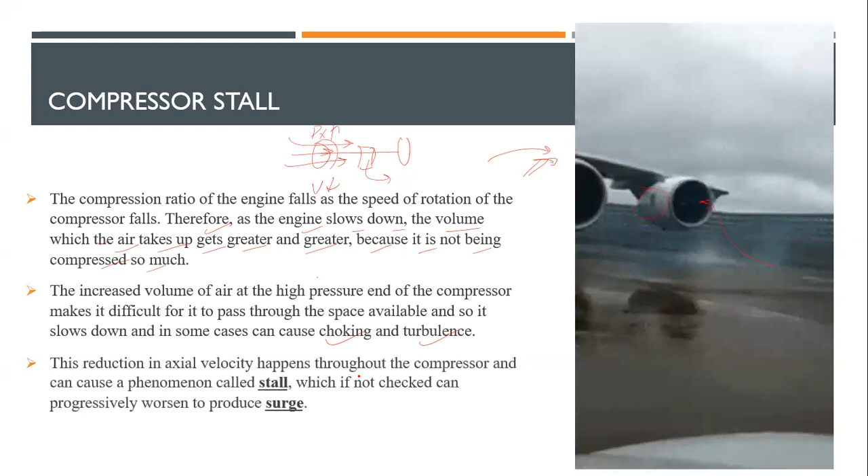The reduction in axial velocity happens throughout the compressor and can cause a phenomena called stall. If not checked, it can progressively worsen and produce surge.

A stall is a part in an engine, so we can have a compressor stall. But when the engine itself starts to break apart because of one of the three factors not working, then we can have something called surge.

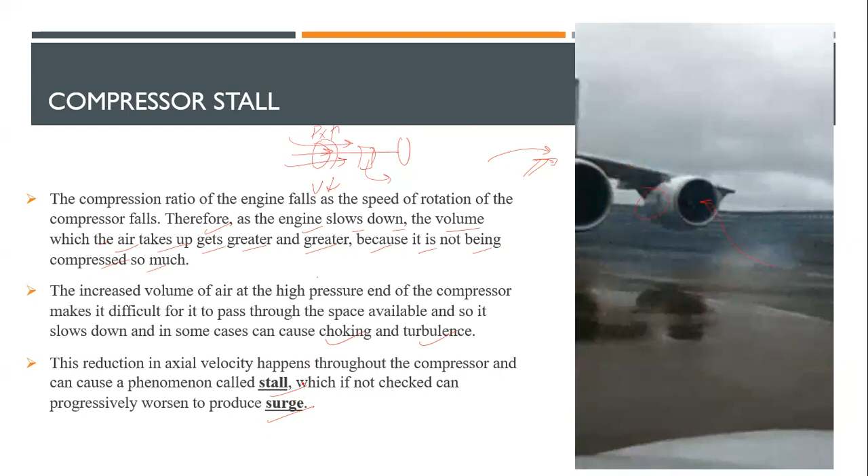We'll discuss the reasons for the stall. As we know, blades also have an angle of attack, and they are shaped like that. So if the angle of attack of a compressor blade is the result of the axial velocity of the air passing through it and the rotational speed of the blade...

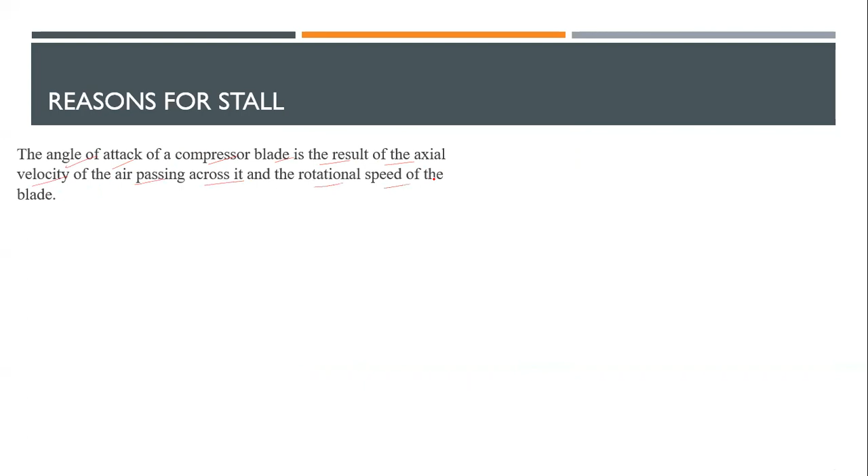If the angle of attack exceeds a certain point, like this example, you can see the airflow itself is distorted. So we will not be able to achieve any values. All this air is stuck here, and when the air is stuck, there is no passing through. Again, we have something called stall.

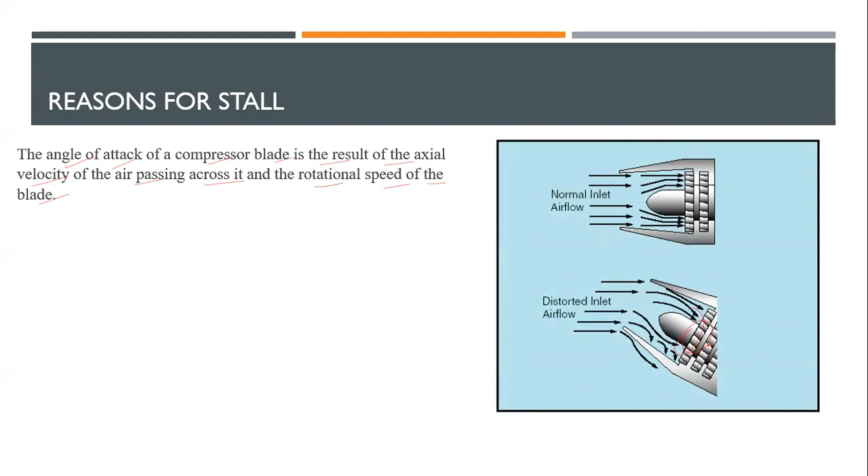Please, guys, don't confuse yourself with the stall of aerodynamics. This is the stall of the engine we're talking about.

Now, compressor stall can occur through various causes, some of which are as follows: excessive fuel flow caused by abrupt engine acceleration, as we saw in the previous video, when abrupt engine acceleration took place.

The axial velocity is reduced by increasing the combustion chamber back pressure. Back pressure is simply this: three components are involved - turbine, combustion, and compressor. When airflow is directly introduced here, pressure increases here, so this is a high pressure area. But because air is blocked here and does not go through, we have a restriction.

Remember, it is getting heated up really high. So what happens is we always know things go from higher pressure to low pressure. Comparatively, airflow will try to go this way, and this is known as back pressure. We'll see this also.

Engine operation above or below the engine design RPM parameters increases or decreases the rotational speed of the compressor blade. Suppose the engine manual tells us we should operate within some range, but we do it less than or more than that - then the compressor's angular velocity will reduce, and when that reduces, that will cause stall again.

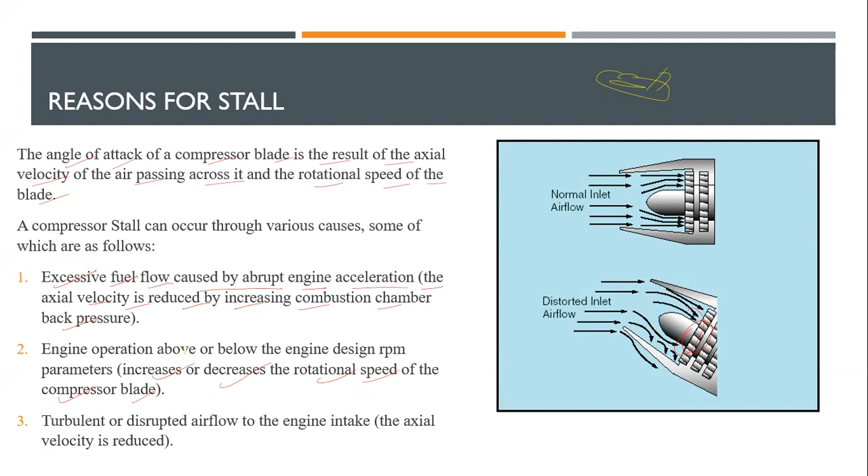Or we have this example also - distorted airflow directly introduced. If you keep increasing the aircraft's angle of attack, this can result in stall. But this is instantly - remember, this is instant, not gradual over time.

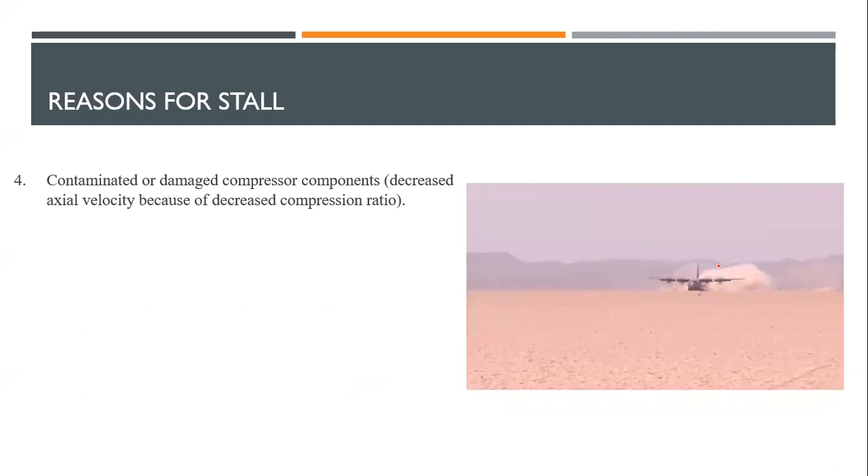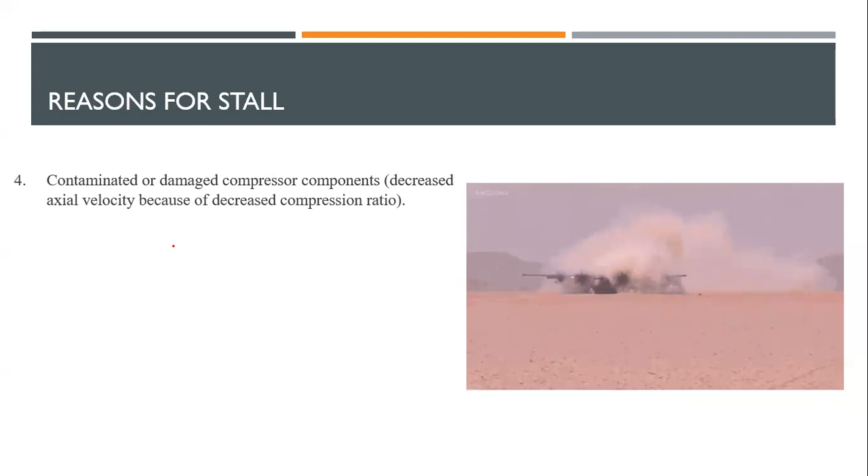We can also have compressor damage. Suppose this aircraft is landing - of course, this aircraft is designed to land in areas like deserts, so sand particles can go inside this type of engine, and it's designed to handle that. But normally, our airlines and commercial aircraft are not designed to absorb these things. So contaminated, damaged compressor components can also lead to such issues.

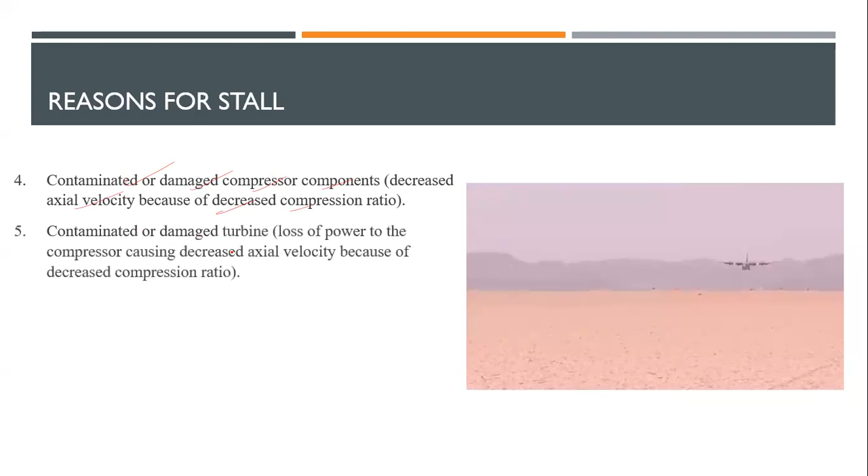Not just the compressor - the turbine section can also have this problem.

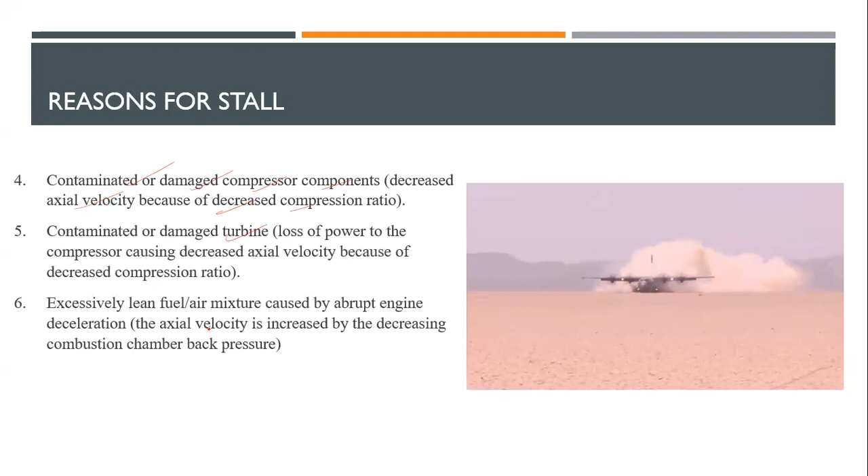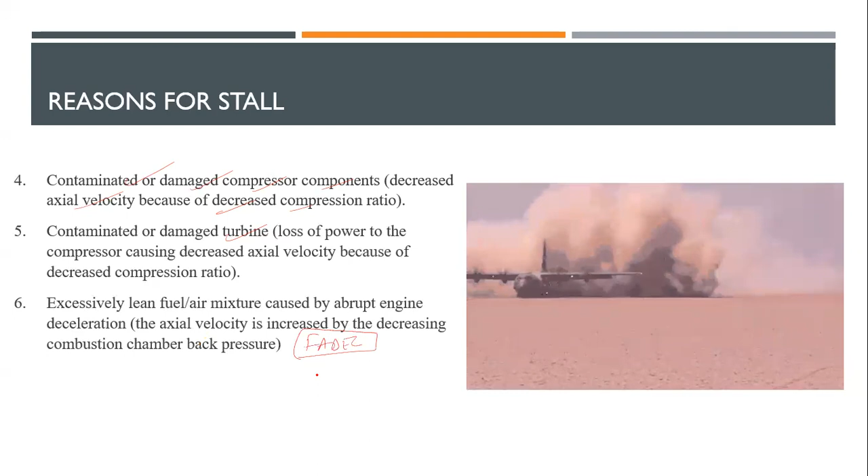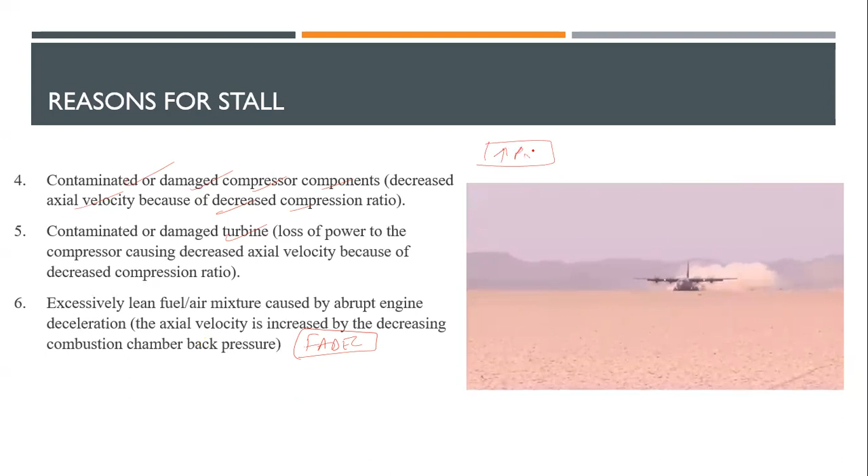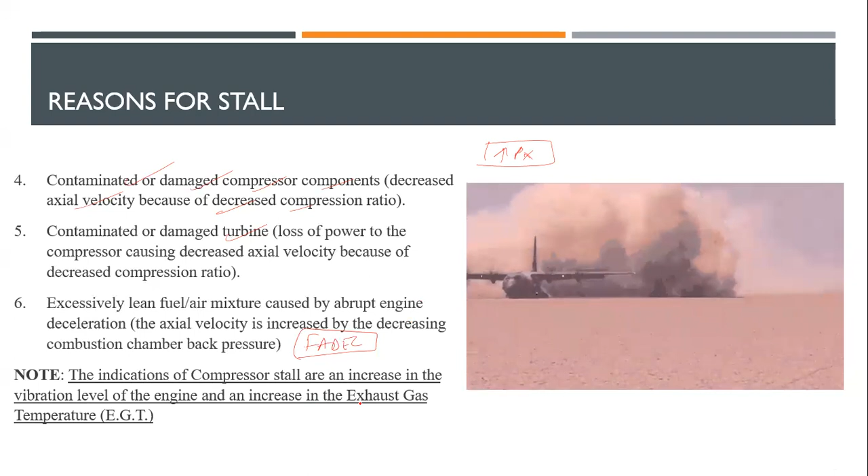The indications of a compressor stall are simply an increase in the vibration level of the engine and an increase in EGT. EGT is exhaust gas temperature. Now, why is the compressor stall recoverable?

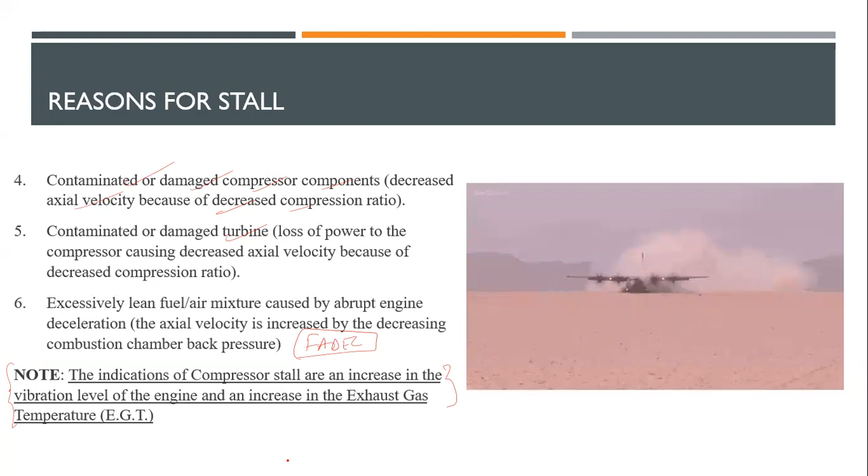Yes, if we get the right indications. If the pilot gets these indications and acts at the moment, then they are okay. But if they ignore it, then we have something called surge. Then the engine is gone out of the hands, and we are wasting our

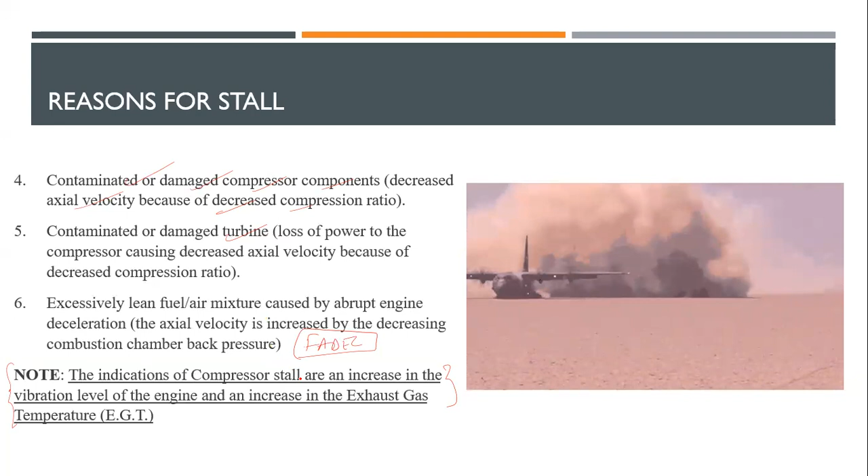one million dollars. So as I'm talking about this, just underline these things. If you have notes, highlight them because this is a direct question: what are the indications of compressor stall? Engine vibrations, or increase in vibration level, and an increase in EGT - both of them.

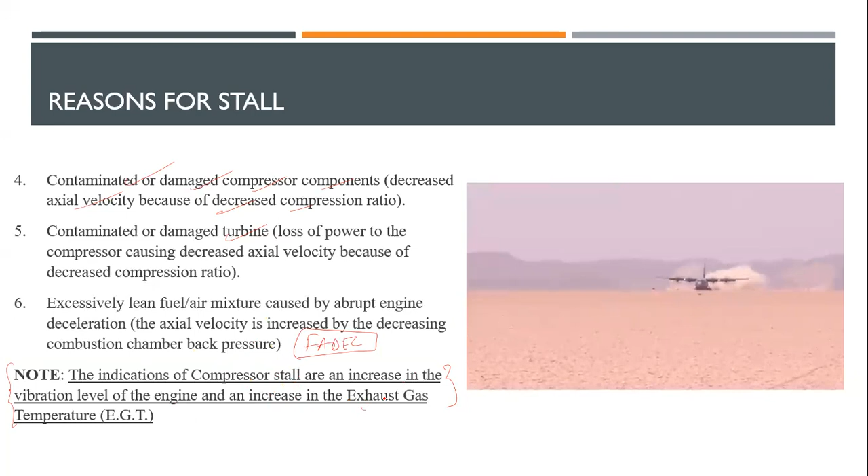Now we have the surge. What is surge? It's the progressive deterioration of the situation of the stall, which will eventually cause a complete breakdown of the airflow and an engine stop. In severe cases, that would cause an instantaneous reversal of the gases in the engine, with air being expelled through the engine intake with a loud bang.

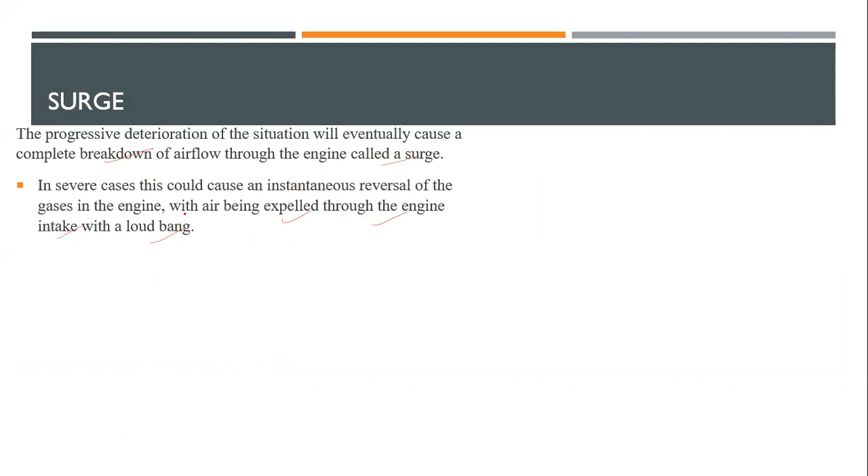As I told you in the previous example, that's the same thing which happened here. If surge does occur, the throttle of the affected engine must be closed slowly. If not, the engine will go into a boom. This situation is most commonly caused by fuel system malfunction and mishandling - if the fuel system, automatic or otherwise, is malfunctioning or mishandled, we can have high lean mixtures, and again stall, then again surge.

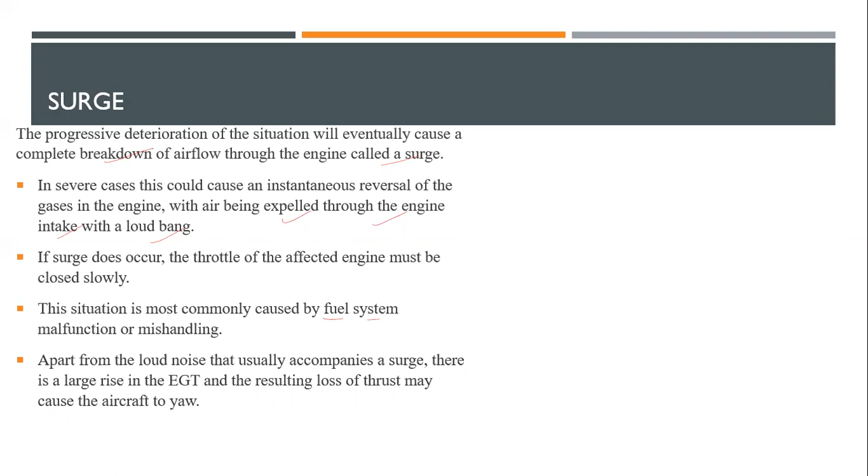Apart from the loud noise that usually accompanies a surge, there is a large rise in EGT - exhaust gas temperature - and the result is lost thrust. An aircraft can also yaw. You can see here we kind of had something like that. The airflow is being expelled outwards.

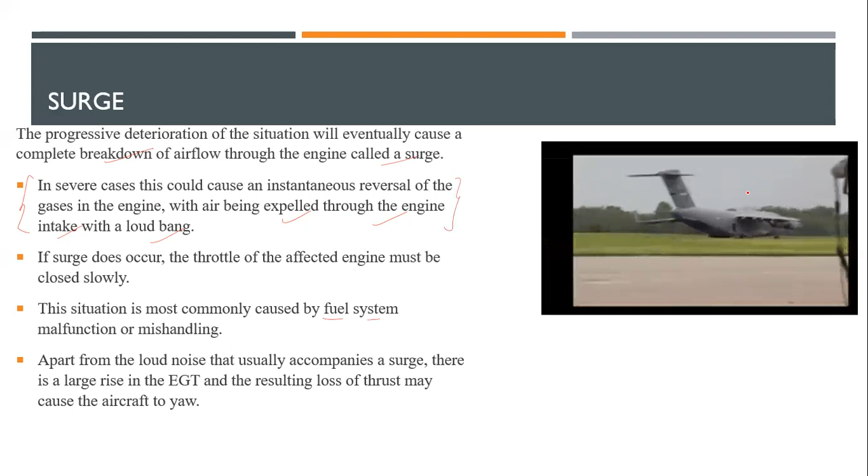But this is a case of reverse thrusters also. In the C-17 we have a reverse thruster, so the aircraft is in back gear, you can say. But this is an example you can have - when you're having a complete surge of an engine, it will behave this way, so the aircraft is taxiing backwards. It'll feel like that, all right.

Note, surge is a complete breakdown of airflow through the engine, which in the worst scenario can cause the airflow through the engine to instantaneously reverse its flow direction, which is shown in this video.

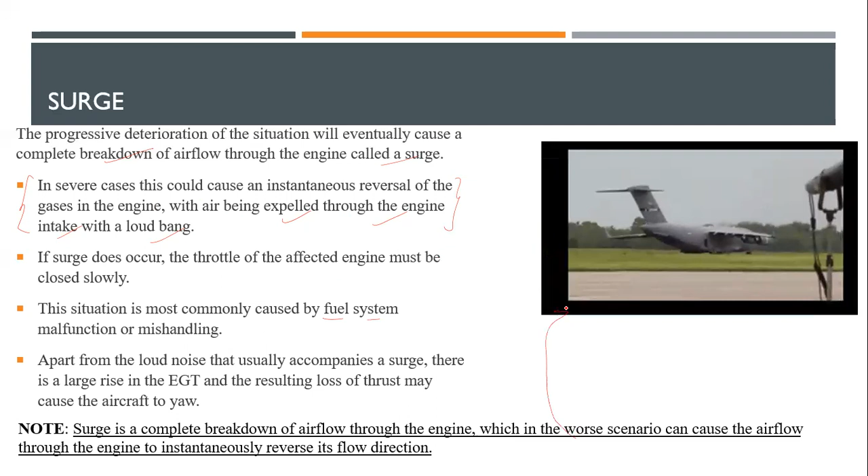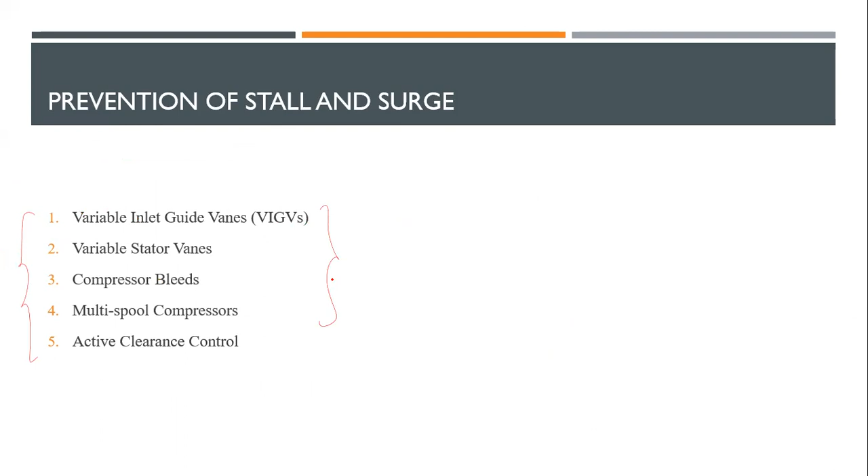Prevention of stall and surge - how do we prevent this? Now we know what is the problem, let's see what is the solution. We have variable inlet guide vanes, one of the best things we can have - I'll explain you one by one. Variable stator vanes, compressor bleeds, multiple spool compressors, and active clearance control. By their own definitions and words, you can understand what they mean, but one by one I'll give you the example and explain what they are.

This is your variable inlet guide vane. What is the variable part here? You can change the angle of the inlet guide vanes.

What is the role of this? If you're able to guide the airflow properly at high angle of attack, you can reduce problems. You can allow more airflow inside, or when you don't want more airflow, you can turn these variable inlet guide vanes. Of course, the pilot does not do all this manually - he has a lot to do other than this. This is already a system: the engine itself maintains variable inlet guide vanes. These vanes are fitted just in front of the first rotor stage. Important point: at low compressor speeds, the VIGVs are angled to impart the greatest amount of swirl, thereby correcting the relative airflow. They're closed at low RPM because when we are at low RPM, more airflow being introduced can cause surge.

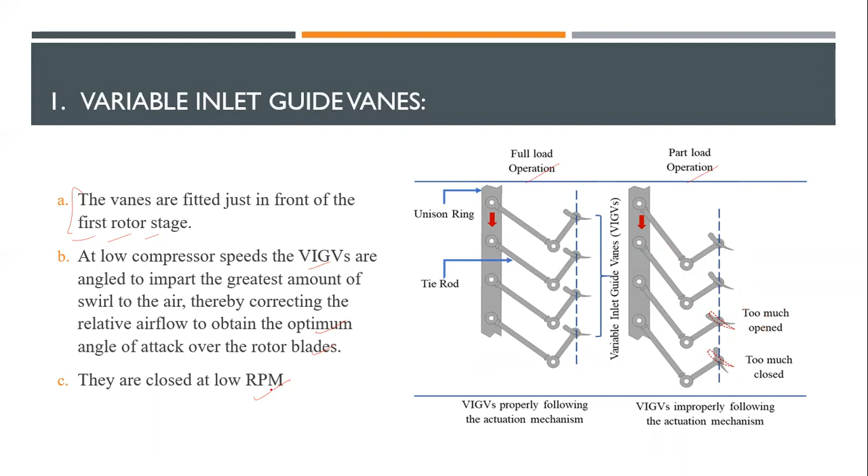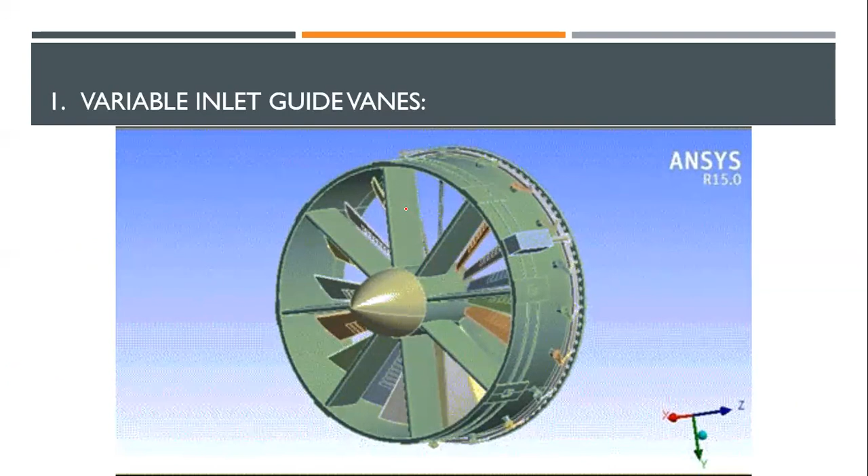So you can see both of them operating here - these are the full load operation. Too much open, too much close - all these things are written here. All in all, you have to make sense of it. You could start to imagine what I showed you in the previous video. Whenever we are having high RPM, we need more airflow inside, right? More combustion is taking place. When we are at low RPM, we can close these so that not much airflow can go inside.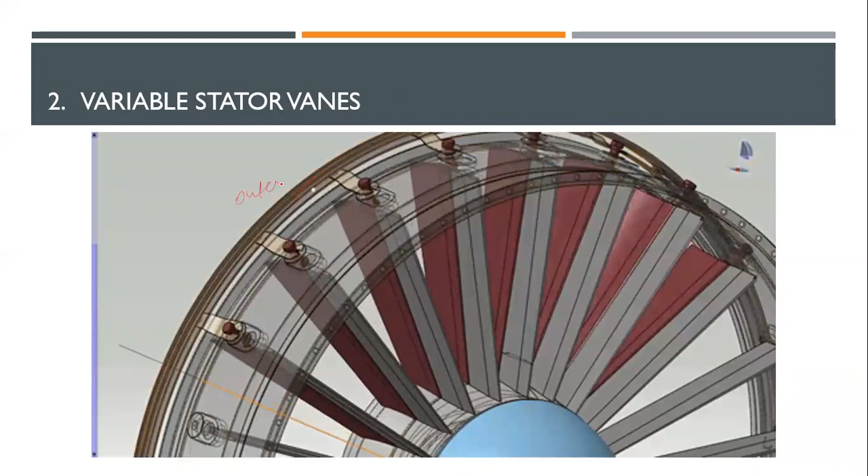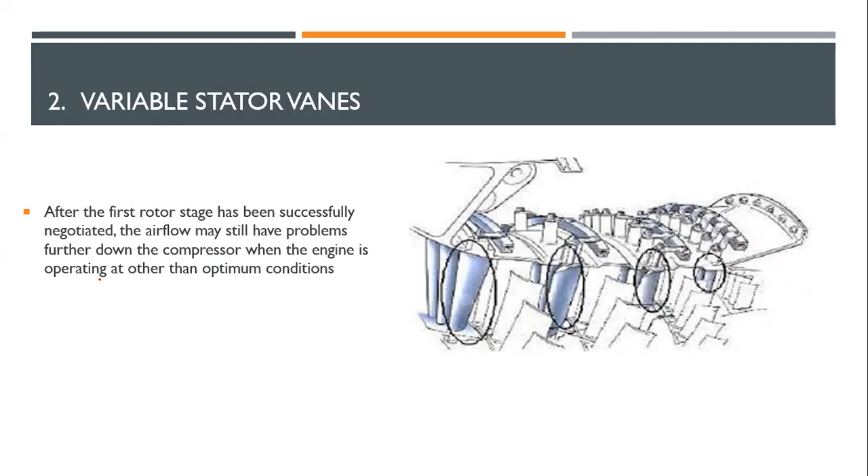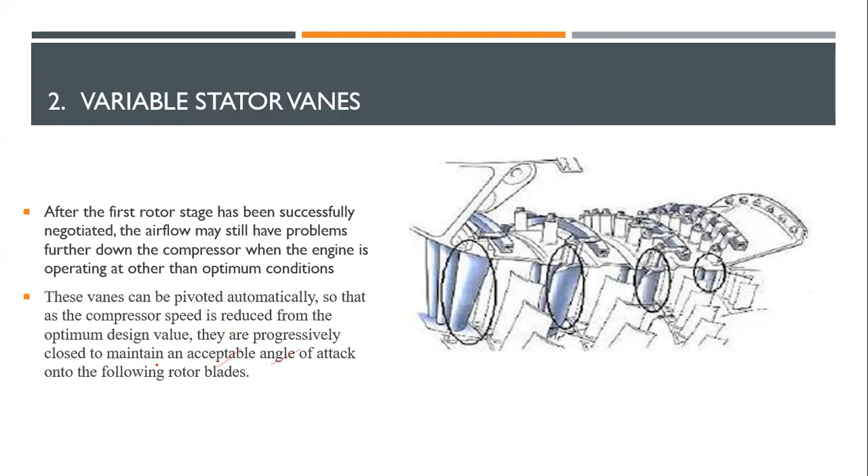Variable stator vanes - so these are also variable. You can see these are variable, you can change them, and you can clearly see it is attached to the outer casing, the stator or stationary vanes. After the first rotor stage has been successfully negotiated, the airflow may still have problems further down the compressor when the engine is operating. The vanes can be pivoted automatically so that when the compressor speed is reduced from the optimum design value, they are progressively closed to maintain the angle of attack. Again, the angle of attack plays a role here - not your aircraft's angle of attack, it's the blades, your stator vanes, your rotor.

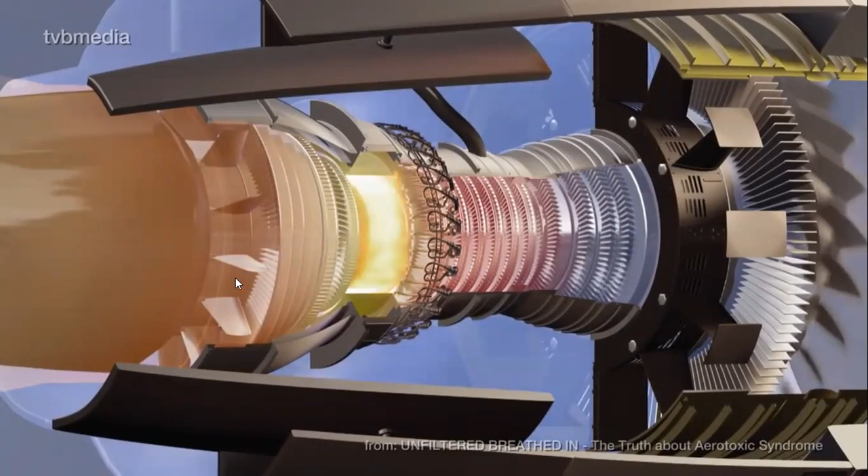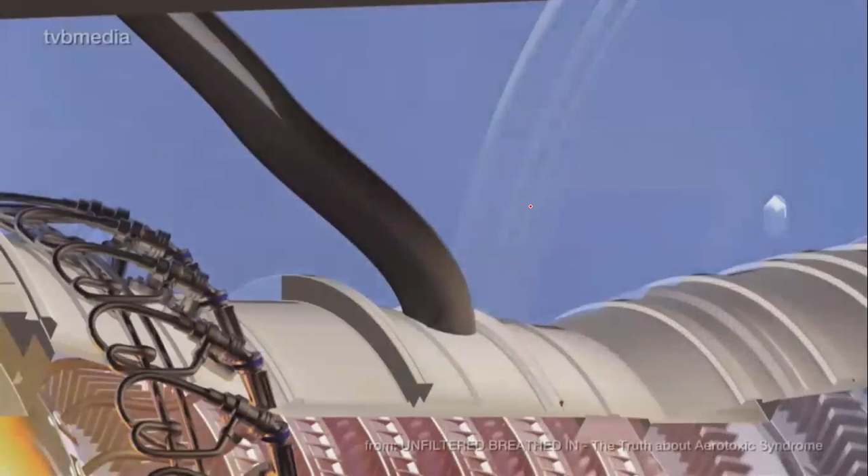Then we have the bleed air. The bleed air is simple - if we have a lot of airflow inside, we will simply escape it. This keeps the rotation in motion. Most engines also provide pressurized breathing air or cabin air. This air is let off from the compressor stages within the turbine. It is therefore called...

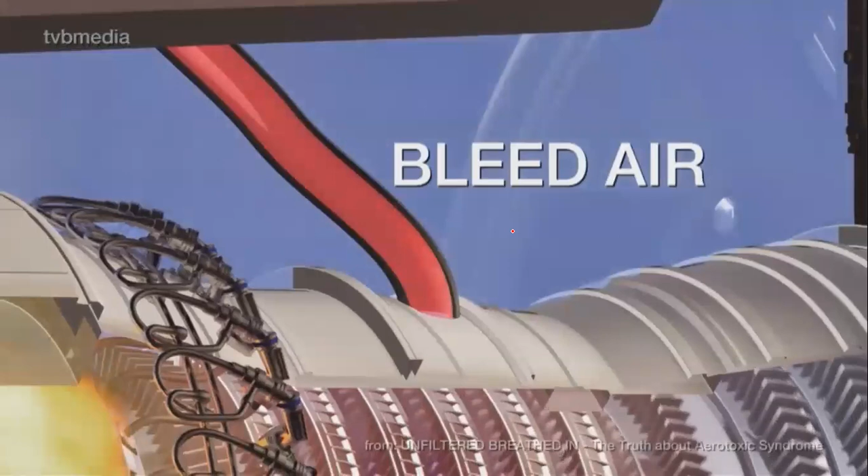Air conditioning - good. As you can see in videos these days, people explain that the air in the cabin and cockpit keeps on circulating and refreshing, every 20 seconds or so, for the same reason. When we are taking some air, this is fresh air, it is cold, it is fresh, so we just direct it into the cabin. We have filters inside and many other things, so the bleed air is used in such ways.

And what is its role in this? If a lot of airflow has come and the compressor is not moving properly, what will happen is we will direct some airflow inside so that the compressor starts to circulate as it wants, and the stall does not occur. When the engine slows down, stall might occur.

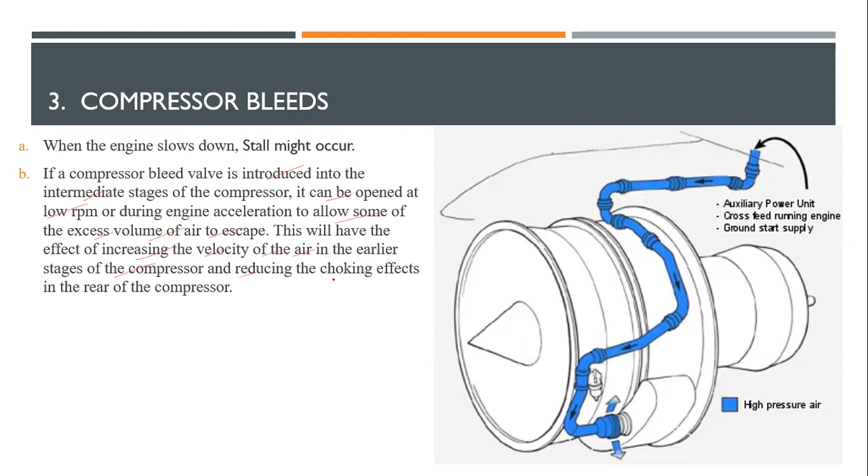If a compressor bleed valve is introduced into the intermediate stages - that means in the middle stages - it can be opened at low RPM, allowing some of the excessive volume of air to escape. This will have the effect of increasing the velocity of the air in the earlier stages, reducing the choking effects. Stall is like a choking effect of the compressor, and that is what this is avoiding. The disadvantage of the system is that opening compressor bleeds, whether they are stall preventive measures or bleeds...

What does it do? We are decreasing the overall mass. When we reduce the overall mass, remember force is equal to mass into acceleration. If we reduce the mass, the thrust reduces. That is the major disadvantage.

But the pilot has one option, either to save the engine at the moment or to maintain the thrust. He or she will probably choose to save the engine and open the bleed air. This will cause a drop in thrust for a given throttle position, which raises the specific fuel consumption or SFC. It also raises the EGT because of the drop in the amount of cooling air available.

So we have these reasons, but we know for sure that the engine is about to stall, so we will do the necessary action. Of course, it's also automatic, and the bleed air keeps on working. But the pilots also have a special control in the cockpit.

You can use it for external power, or if you want to increase it, you can see the APU, cross feed, and the ground start supply. They feed into the engine. So if you remember, someone asked me, or I also asked you, how do we start the engine if the compressor is the first part we spin? So I'm giving a hint right now—these are the things we can use to initially spin the compressor.

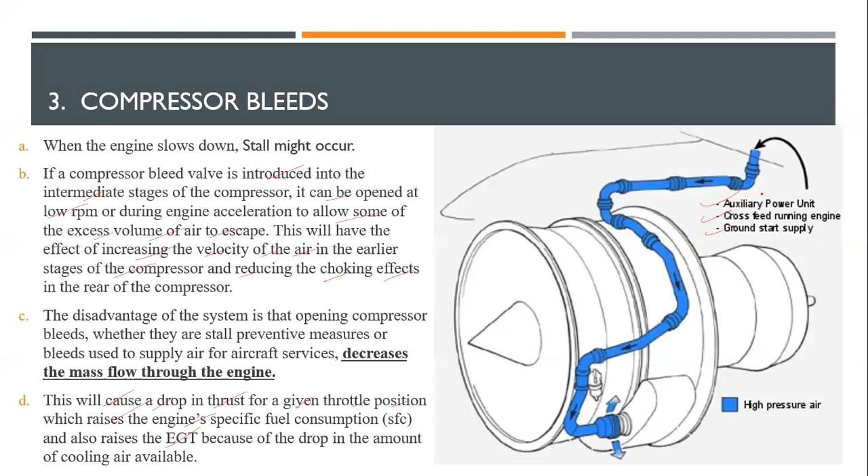Then we have the multi-spool compressor. I think I've already told you what this is, right? So if you have multiple spools, that is different spools, then what happens is we have a gap, or simply this one is already a little less, this one more.

So what will happen is one of the compressors works with high pressure, the second one works with low pressure. So the workload is distributed among all these compressors, and only one of the compressors does not carry too much workload. Just like in the cockpit, the workload is shared by two pilots—the compressor also shares the workload.

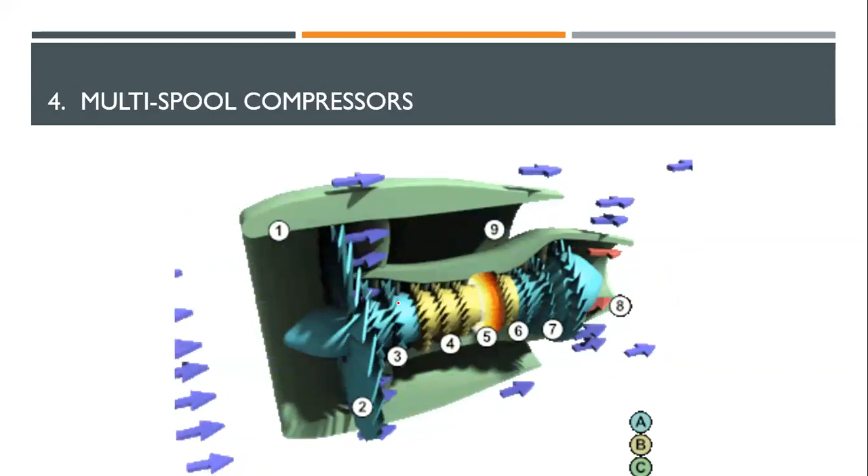Each section is driven through a shaft, and the whole unit of compressor sections is known as a spool. I've already explained spool. By designing the engine so that upon closing the throttle, the speed of the low pressure spool falls more rapidly than the high pressure spool.

We can see with this picture also, there are two shafts, two spools. So according to the throttle and the pilot's control, these will also move and rotate.

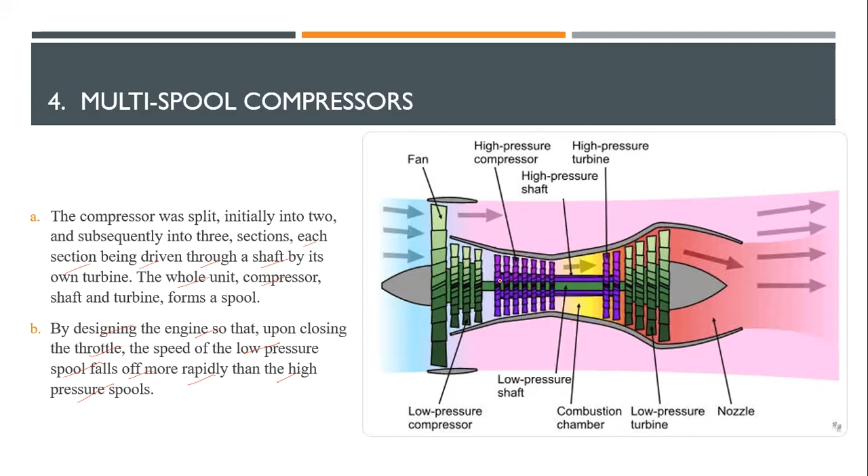Okay, then we finally have these—what are these? Active clearance control, which can be seen here also. Basically, we are allowing some portion, this portion, known as the clearance area—the small gap. You might not be able to see much, but there's a small gap between the casing also, you can see it here.

What is this gap used for? The axial velocity can be controlled over the whole of the engine speed range, so the chances of a stall and surge happening are less or diminished. So the airflow, at least stopping here, there is some point it can go here and there—here also you can see there's a small point it can go over the top.

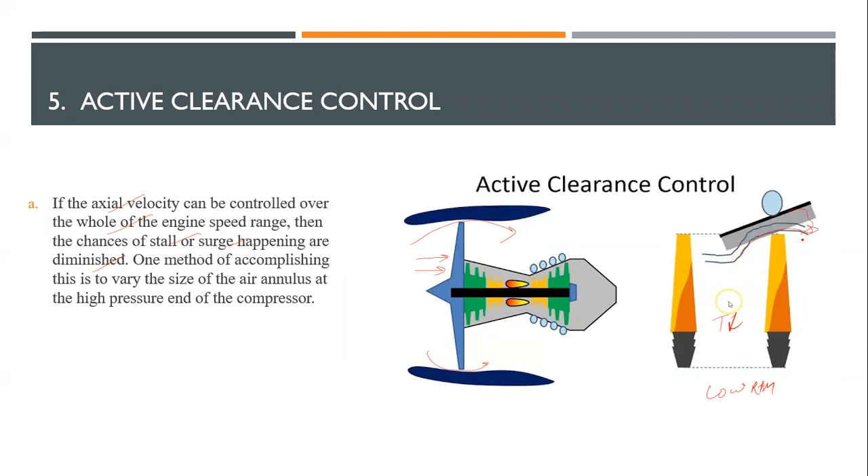When will this happen? You need to understand this clearly—when the temperature is less, the compressors are not moving properly, so at low RPM what happens? At low RPM we have temperatures less, so we can assume these will not be expanding, they're not expanding or rotating. We have the space, that is the clearance area, and when we have the clearance area, the air will move like this.

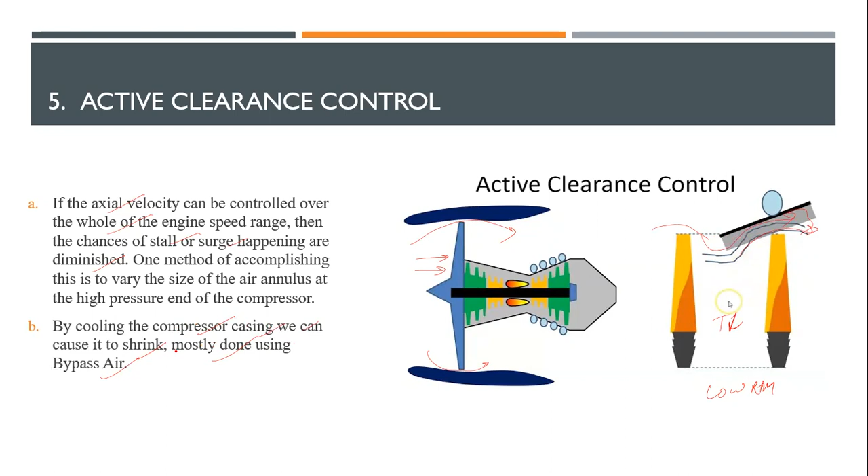By cooling the compressor casing, we can cause it to shrink, mostly done by the bypass air. I've already told you, whenever the engine is cool, we will have the active clearance control, and whenever we have the active clearance low, we will have less chances of stall. That ends the chapter. Do we have any questions?